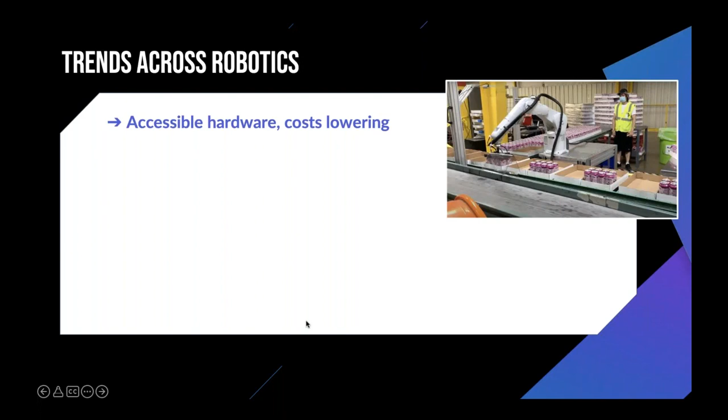Thanks, Meredith. So starting off, I'm sure you've heard a lot about automation and robots, and you wish you could get involved, but it is a steep hill to climb if you're not coming with a lot of knowledge. So what we're trying to do here is really just explain what the trends are, what are you seeing in robotics, and put a fine point on it, and hopefully that'll help you guys make decisions.

One major thing that's happening here is this idea of commoditization of all the hardware that's involved with the robot. If you want to get a robot up and running, it's not just the robot itself, but it's also the stand that it comes on, and the gripper that goes at the end of the robot arm. There's vision, there's electrical components, there's safety.

And what we're really finding nowadays is that those prices are dropping. Robotic hardware is now a commodity, and what's sort of left over that is not a commodity yet and is still very difficult is how to get those pieces of hardware to work in your environment. How do you get that robot to do the thing that you want it to do, which is still quite difficult today. You may have also heard the term collaborative robots or cobots.

And this is a new class of robots that are meant to be working very closely with people and workers. This isn't sort of the cage robot you might find in a welding cell at an automotive factory. These are meant to be working next to people, being driven by people or tasked by people. And so this idea of collaborative robots extends not just to robot arms, but to mobile bases. Can you start using robots that are people friendly? And not just safety wise, but also use wise.

And so this has spurred on a lot of technology and a lot of companies. And what we've identified as a greater robotics industry is that we need to get these tools to be much, much easier to use.

I mentioned the mobile robots. Those are sometimes also called autonomous mobile robots, or AMRs. It's basically a new class where these robots can navigate the floor by themselves and basically make deliveries within the floor, or move material handling things, do material handling tasks by moving parts from one end of a facility to the other.

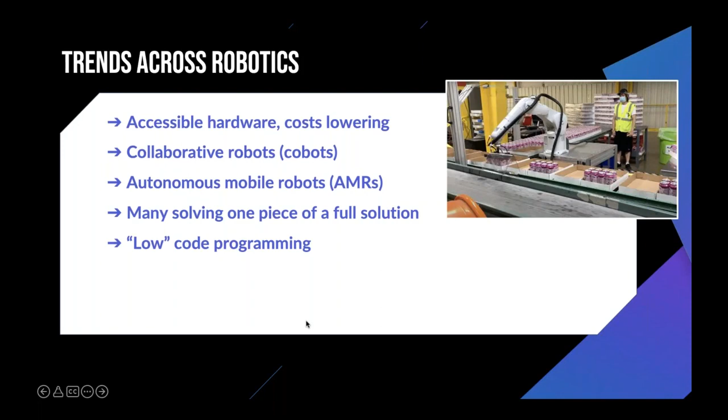We'll talk a little bit more about this term within this Industry 4.0 concept called high mix, low volume. Can I not look like a car manufacturer and look more like a copacker and still be able to automate? The short answer is yes, Southie is here to help, but it's not as clear cut as you'd hope it'd be, but that's what Southie and other companies like us are trying to do.

There's this whole notion of low code programming or easier setup and programming, and we'll talk about what that means. But it's a trend that you should sort of keep your eyes perked up about. Either it's called low code or no code, meaning that these are robot systems that are meant to be easier to use. And as I was alluding to, integration is still the barrier.

It requires hours and hours and hours of expertise to even know not just how to program the robot, but then how to put that robot into an environment where it can operate in the best way possible. And I'll talk a little bit more about what that means.

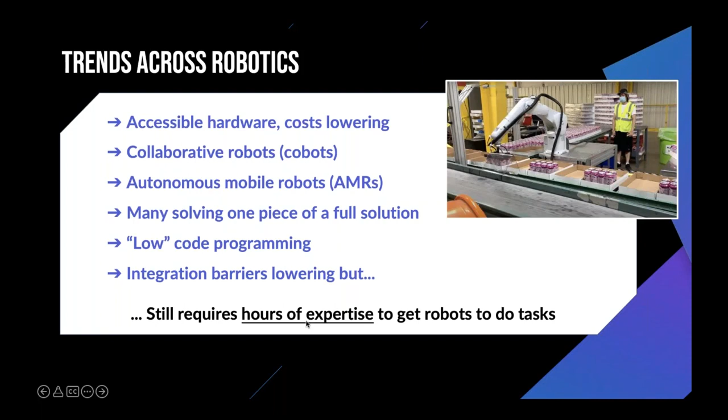And that 10% makes up the $28 billion robotics industry just from the hardware side. The systems and integration and software side are almost 3 to 4 times that cost. And so what we're missing is the rest of the 90%.

And what's really driving that 90% is that they're completely automatable. We should be able to automate them, but they're done manually today. What's driving that is the fact that there is a lot of variability across how often you're doing that thing. It really points to this idea of high mix, low volume, meaning that you have lots of different products, different SKUs that you're running through.

You're just doing it at smaller volumes than a very large manufacturer would do. But the tools that we're developing, the tools coming out of the robotics industry, should be able to address that problem. The trend is that robots should be ubiquitous, every copacker should be able to use them, but we don't have that right now. Well, why is that?

The main barriers here are changeovers. We have that high mix, low volume situation. You're going to do a different product daily, weekly, or monthly, and those volumes are going to be low and they're going to change. The brands driving these trends for consumers are also demanding more and more variation in their product.

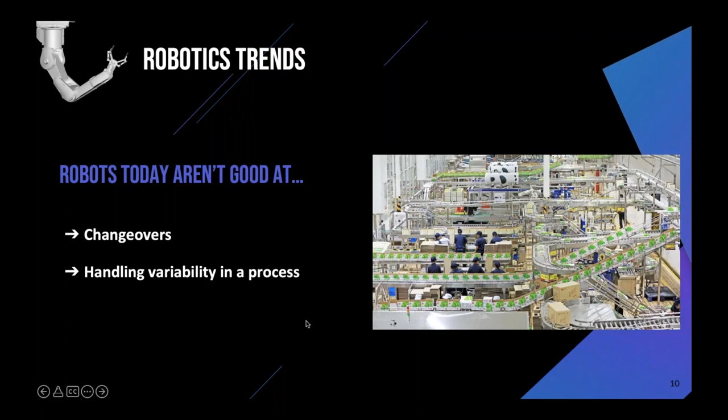So what we have to be able to do with our robotic systems is handle variability within a process and across processes. The part I'm packing doesn't come to the robot exactly the same way every time. I don't have specific feeders for every single part variation. And I'm not going to run one process all day, every day for years. I'm going to run through 30 different SKUs over the course of a month, or maybe 10. Even if it's just 10, it's still really hard.

So what that means for a robot installation is, in order to automate high mix, low volume applications, you either need in-house expertise to be able to change that robot over a lot, or you want to work with an integrator you trust greatly who can do that—however, that's not the case today, integration is quite expensive—or three, work with someone like Southie, where our whole tool set is to make it easier for people to change over on their own with their in-house folks, without having to have that robotics expertise all the time, which is expensive to develop and hire for.

So just to lay that out graphically, one of the things we talk about with high mix, low volume is the number of production runs. For any given run in a process, how long am I going to do that same run for? Is it a month? Is it 3 years? Is it 10 years? And then for each one of those setups, each one of those processes, how much does it actually cost me to set that up?

This is another way of saying how much expertise and tuning do I need in order to do this. Hardware is obviously a piece of that cost, but what we'll talk about is that for any given robotic project, the cost is about 20 to 25% hardware and about 75 to 80% integration or non-recurring engineering costs, where you get an integrator or use in-house engineering to actually get that solution up and running.

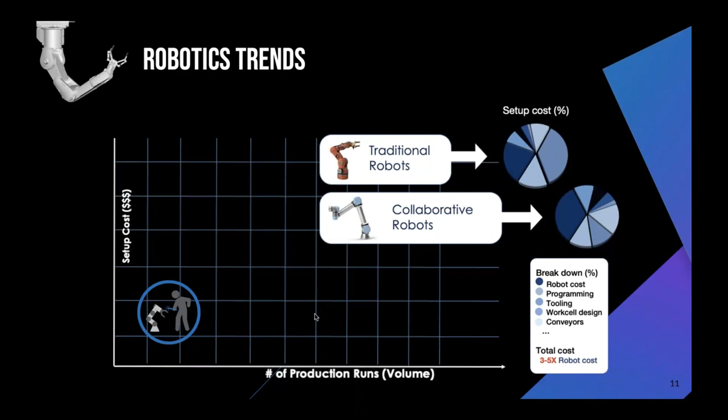And that's the sort of low code, no code place that a lot of companies are playing. And for Southie, what we focus on is that really deep lower left-hand corner. Can I run one shift and have the robot do something else on another shift?

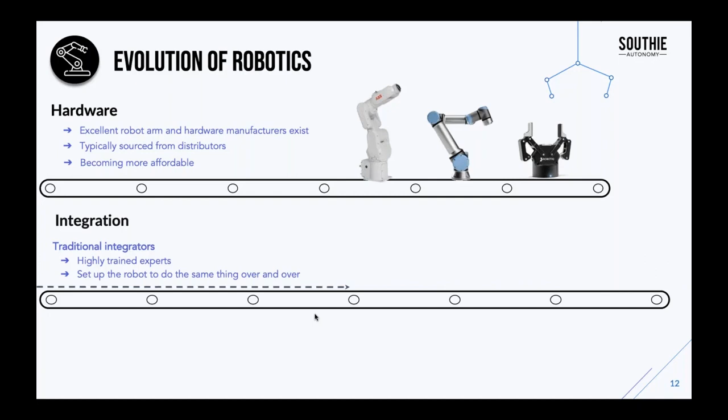And so when we're going to talk about robotics, and basically for most of the rest of the talk, what we're going to focus on is this integration piece. How do I get this hardware to actually do the task that I want it to do? And so we have a few options.

The first is the traditional integrator route. You're going to hire a third party with trained experts. They'll come in, assess your process, make some recommendations for what that robot process should be, and then do the integration for that. However, since that is integration heavy, a lot of that cost is going to be their time to make sure that your process is exactly spec'd in a way that's friendly to a robot, right? And the part's going to come exactly to the robot in the same exact way every single time with no variation.

And then can I place it into a pack or whatever we're going to be placing into a pallet with specific boundaries of, is it plus or minus 1 millimeter or plus or minus 2 millimeters? How close can I get that part to be presented to the robot the same exact way? And the more precise you have to be, the more expensive the cell will get. There's ways to mitigate that with vision, but then again, now you need a computer vision expert to maintain that process. And lighting and all sorts of other factors will vary. The temperature will vary how well a computer vision solution will work.

So traditional integrators can get very expensive very, very quickly. There's a lot of integrators that won't get out of bed for less than $1 million. And so if you have a task that's going to cost less than that, if you have one particular station with one worker or two workers in there, is that going to provide you with ROI?

Probably not. And so there's a whole set of other tools that are out there that you'll either, if you have in-house engineering, you can start using that and training them up on these what we call low-code type of solutions where it's slightly easier, but you still have to know about robotics. You still have to understand how robots should move and how to bring the parts to and from the robot. There's things like waypoints and drag and drop.

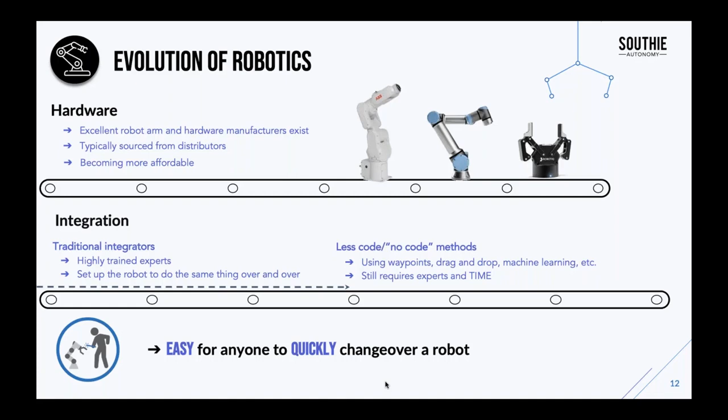Thanks, Rahul. I'll pause here just in case we have any questions, or if anyone wants to comment in the chat, have you experienced these things Rahul was talking about? Have you done research in robotics, and has this come up as a trend? Have you seen companies like Universal Robots or others teach this waypoint kind of drag-and-drop method, less code or no code, to help reduce some of that integration process? I'll do a quick pause for questions, if not I'll keep moving.

I think, Meredith, there is a question that popped up. You mentioned a shift or one day's worth of production. Is that kind of the checkpoint for this? Is it one day's worth of production and you can probably justify these things or not?

Yeah, that's a great question, Ron. It kind of depends on the robotic solution you're looking at. I can speak from a Southie perspective - we've had customers that run one shift and have seen return, based on our model, which I'll talk more about in a couple slides. But the traditional integrators will typically be looking for more than one shift to find that return because the cost is so high. They're looking for higher repeatability, higher volume to see return. In terms of the less code, no code methods, there's kind of that in-between ground - it depends on who you're working with and what solution they're providing.

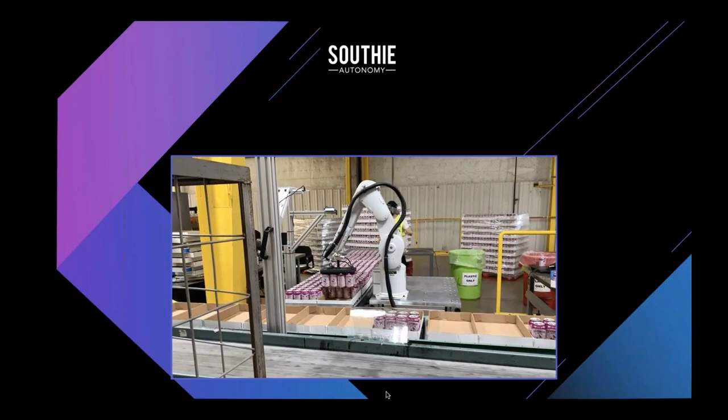Great, thank you. All right, let's move on to the next section here. We're going to talk about how to start automating, and I'll be using our variety pack use case as an example of how we walk through that process. We'll have a few points on why this was a good case for us to start with.

So to begin, we need to start incorporating automation. We have a lot of challenges with labor in the market, and we can use robots to help offset some of those challenges. But how do we start? Typically, what we look at first is making sure we're aligned with the business team and the operations team, and making sure you see alignment across the company on your goals for what you want to achieve with automation and where you want to achieve that return.

So success of a total automation project does require buy-in across teams. At Southie, we recommend having point people for the business end, the ops end, and the maintenance end. When we help facilitate these discussions with our partners, we do this early on in initial project discussions. Why is this important to have everyone in the room? We want to make sure the goals align for each area of the business, and that we can drive towards meeting those goals through our design and automation, and where we pick to start automating.

So for the variety pack project, for example, we had the business team thinking from more of a strategic perspective. They're thinking about adopting automation for our customers, since our customers want to see us innovate with technology, and we have board or leadership pushing for automation too. So the business mindset always seems to come from what's our cost return, what's our bottom line, and how we can influence external partnerships.

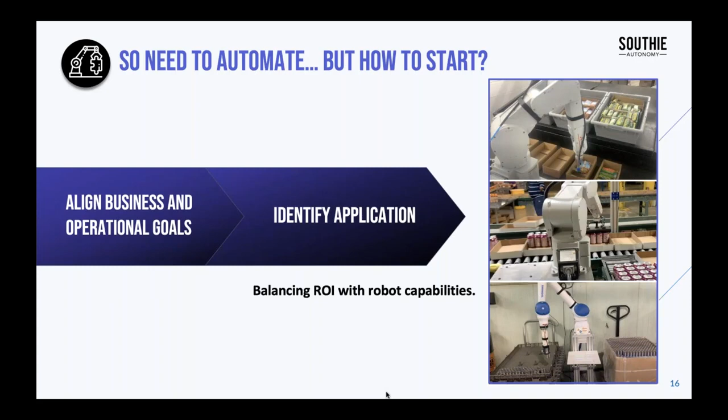Another thing is to make sure you're balancing this return with the robot capabilities today. If the application you want to automate is too complex for the technology that's available, it could require a lot of engineering hours, and this could mean a long time until you get the robot on the floor. It might be possible, but it's just going to take a long time to actually see return.

In order to assess the complexity of the application you want to automate, we do recommend consulting with an automation or robotics engineering expert. At Southie, this is something we do to help our customers and partners spec out the best place to start. But you might have someone in-house that's an automation or robotics expert. We really recommend having that person in the room to discuss where the best places would be to start.

For the variety pack use case, for example, we looked at factors like the volume of the task, and the number of shifts that the variety pack is running on the line. In this case, we were able to see return on a one-shift operation, but it was not the only product running on that line. There were other products running on that line too, and they were still able to see returns specifically just for the robot packing cans.

Some other points we considered is that this variety pack application required a high number of workers on the line. There was a lot of people manually packing on the line to be able to hit those daily production goals. So this was a good place to help offload some of those workers by using a robot.

A third point to consider is that if you're running the application for multiple shifts, you do tend to see return much easier for a robotic solution. In this case, it was a one-shift operation, but to Ron's earlier question, for other robotic solutions, usually looking at two or more shifts is better for automation, though it depends on the application you're looking at.

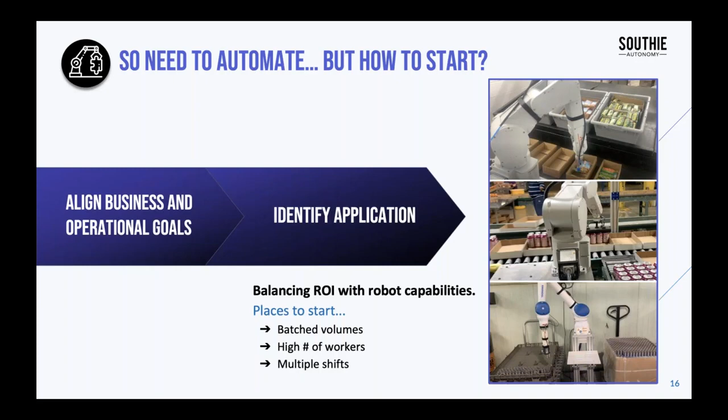Yeah, and that's a very good point. That's why it's important to have these robotics engineering or process engineering experts to understand how the parts are getting to the robot and how they're moving away from the robot. It's not as simple as just sourcing a robot arm itself. There's a lot more components that go into it, which we'll touch on in a couple of slides here as well.

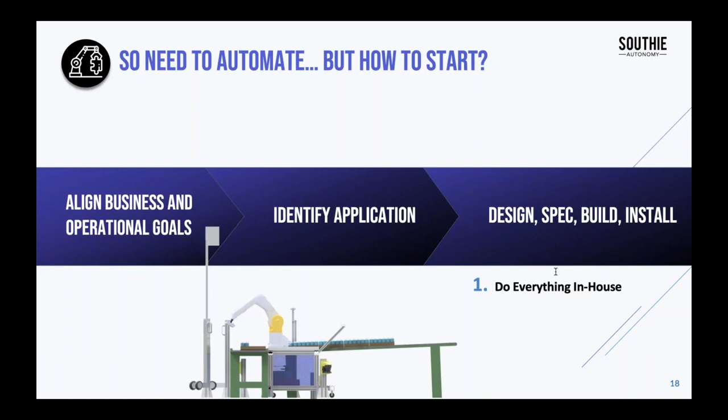But I wanted to talk about, from a high level, some of the options that are available to do this today. So there is the option to do everything in-house. We do recommend having an automation or robotics expert on hand to be able to do this, but there's a lot of great robotics hardware available today and different components where you can source off the shelf and put them together to make a full robotic solution, just making sure you have the expertise in-house to do so.

The second point here is to outsource to a traditional integrator. Traditionally, robots have been integrated with an integrator who will redesign a process to fit around a robot, then create a custom program for the robot to do the same task over and over again. This can be more expensive and time consuming, and every time you need to do a changeover, you'll need to call that integrator and have them reprogram the robot.

Lastly, you could partner with a company like us, where we make this much more flexible than traditional robotic solutions. So instead of having to create a new process around the robot, you can put a robot right into the current process with very minimal changes. This means the deployment time for our partners is significantly less than other robot solutions available today.

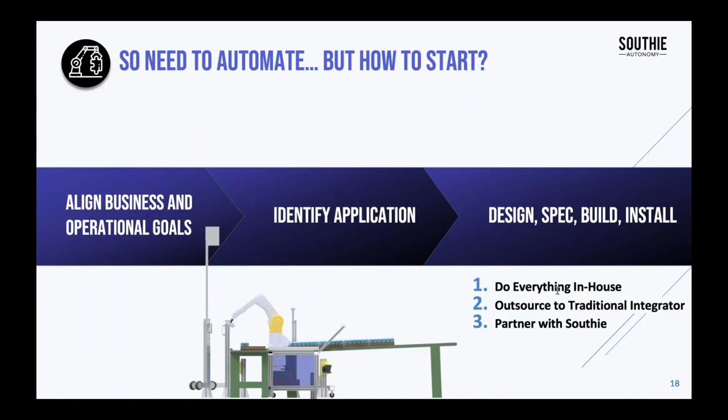All right, I'll pause there for some more questions or any thoughts. I'd like to put it out there, what automation projects are you working on today? And if there's any specific implementation questions, just gonna pause here. The caveat is, if you're not working on projects, why is that? Is it a technical issue, or is it you having trouble identifying the right task? We'd love to hear the challenges in automation. Feel free to use this or put questions in the prompt.

I think you guys can go ahead and go on. We've got some other questions coming, not pertaining to the automation projects, but okay.

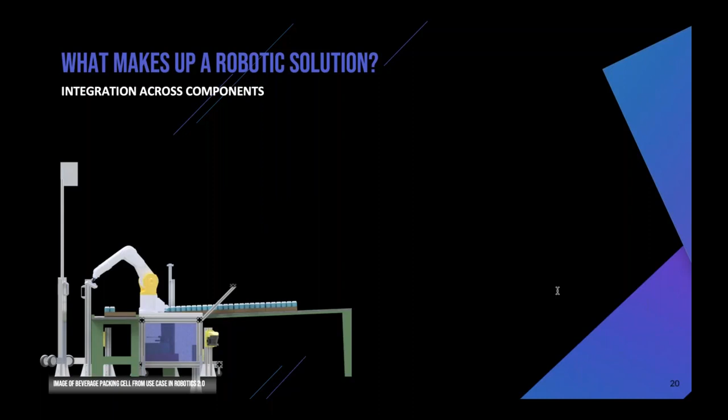Great. All right, so then the next section here, I wanted to jump into a little more detail of that design, spec, install process. What does that look like? So on a high level, just to start, what are the components that make up a robotic solution?

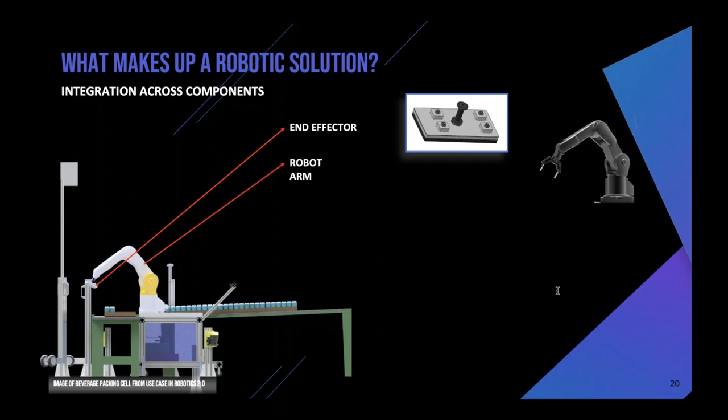Here's a model of that variety pack example robot cell, and some pieces we have in this that are off-the-shelf components are the end effector, the robot arm itself, a camera vision component, the robot stand and mount, and the conveyors. One last piece here is the safety. There are quite a few components that go into this cell other than just the robot arm itself, and each of these components, like the end effector specifically, needed to be sourced specifically for picking up cans and placing those in a certain configuration.

There are a lot of different end effectors you can use on the market today. There's suction, there's 2-finger grippers, and a lot of other different types you can use on a robot arm.

Yeah, and more of these are becoming commercially available off the shelf, so you don't have to spec a custom end effector every single time. There's companies like OnRobot that have stock grippers that are varied, they can pick up lots of different things. There's also something called tool changers by ATI, where you can have the robot cycle through a lot of different grippers to handle different types of product. So if you did have a lot of mix even within one process, it's not a deal breaker that you might have to change grippers.

I think this is also a good point to make a note about the safety equipment. On this robot cell, you can see there are 2 safety scanners, like safety lasers that create a light shield, so if a person were to enter too closely to the robot, it shuts the robot off completely. We also have caging around this variety pack robot for the other areas the scanners don't cover. So it's important to keep that in mind.

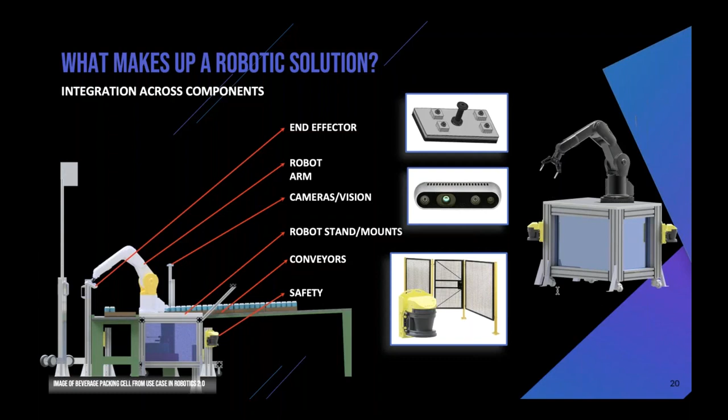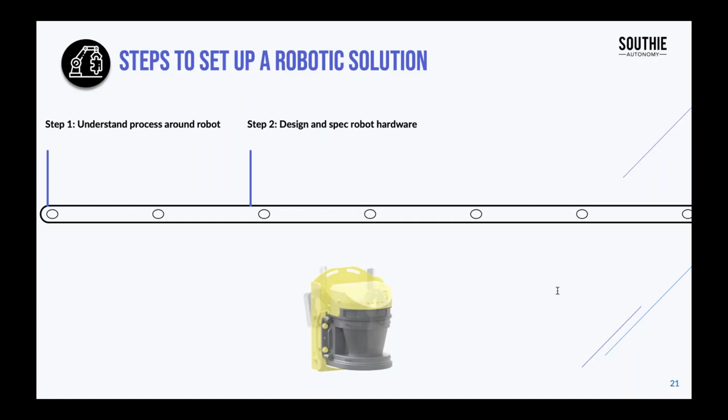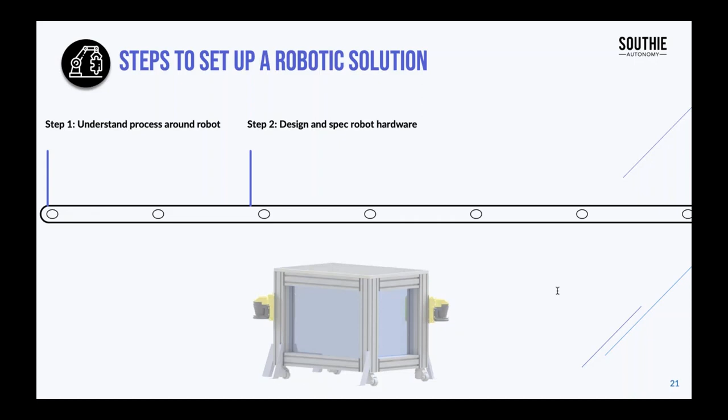So I'll move into the steps for setting up a robotic solution. Once you source these different components and have a design, first step is to understand the process around the robot, then design and spec the hardware according to what fits that process. The third step is to be able to source all those components from vendors and distributors.

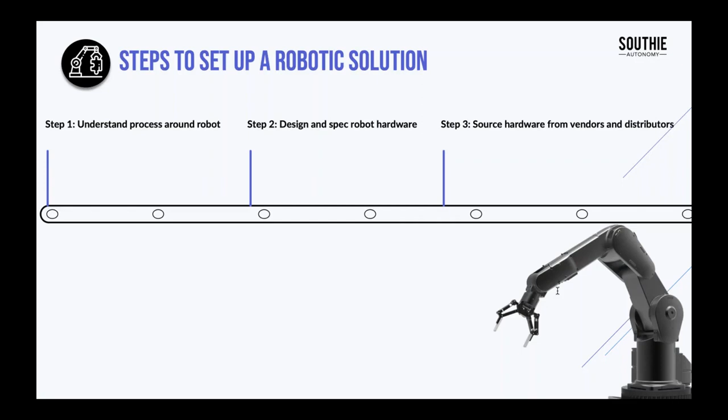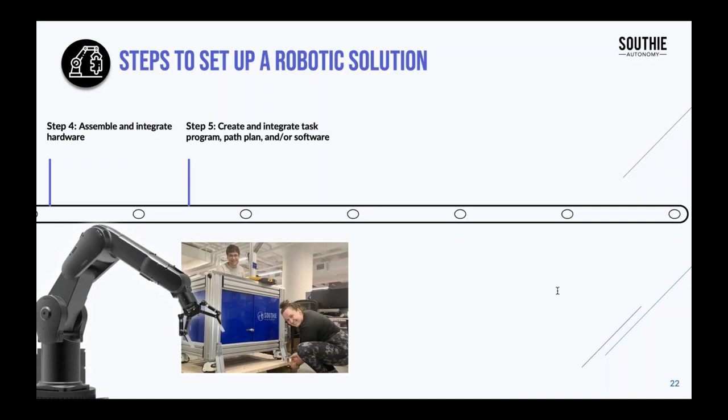Once you've designed the cell and sourced the proper components, then it's a matter of being able to assemble and integrate all of that hardware. The next step is to integrate the software on top of that hardware, using path planning programs, hiring a traditional integrator, or working with Southie. Step six is to install that solution, and the last step is to train people how to use it and maintain that robot cell.

So this is a process, this is how we break down our process. We actually work with our partners to do all of these steps. We help guide through that process, but if we were to break it down, that's what it looks like.

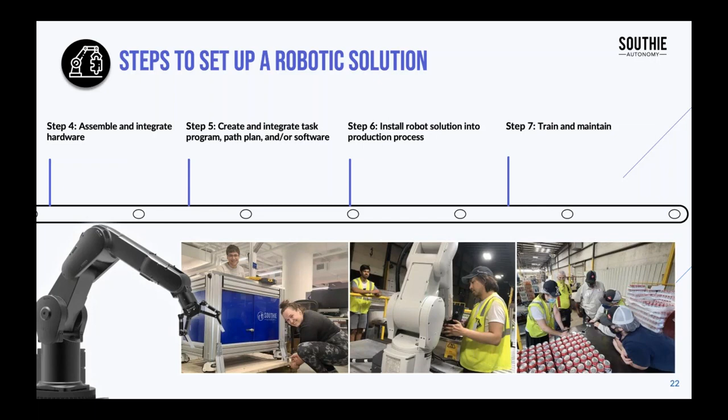All right, I'm going to move into a video of the Variety Pack robot in production to show you how all of this came together. Go ahead and play this now.

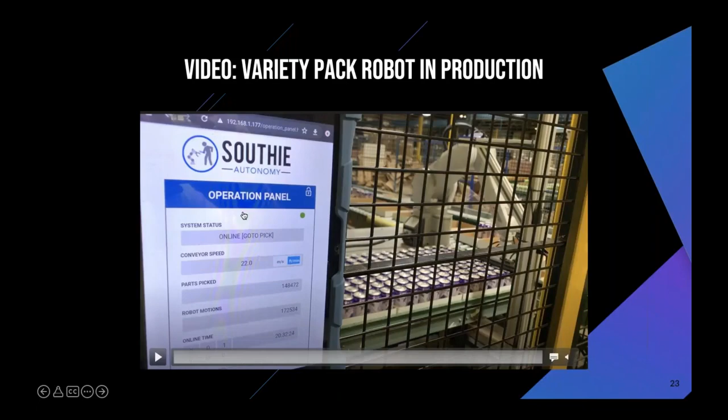What you see here is an industrial robot arm with those components we talked about. It's picking up cans and placing them into every other tray along the line. Workers are working on that line right next to the robot, placing cans directly into the trays just like the robot is doing. Our goal for this project is to make sure we were integrating a robot into the current process versus having to redesign the whole process that exists today.

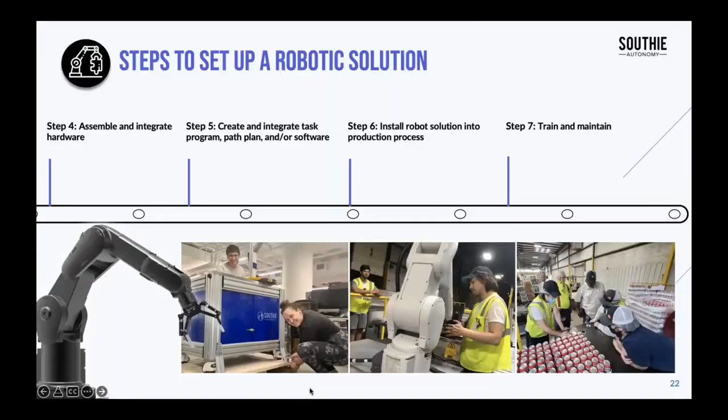That's our goal at Southie, to make a robot flexible enough to work like a human would in this process without a lot of revamp. The other key was to handle in-process variability, like Meredith was talking about, since the cans are going to be slightly off-centered every time, in a slightly different position, as well as the trays coming down the line.

Additionally, if you use our simple app to do a changeover, you would just describe a different configuration. What if it's an 18 pack and you're only placing 4 cans into it, or you want to place the cans in a different location in the tray? That can all be changed without involving an engineer. You could simply use our app or our tablet to describe that task at a high level, and our software will figure out how to change the robot movement and programming on its own.

So in order to change the robot over, you don't have to write any programming at all, no code, no logic has to be communicated, just how the task is different than it was earlier that day or yesterday. This is something unique to Southie. You won't find this at other integrators or other solutions.

All right, so I'll move on to some takeaways, tips, and best practices to summarize. Robotics can be complex, so we recommend consulting with experts in the robotic space to help guide you through this process. This does take time, so start now versus later. There are a lot of discussions around aligning business operational goals and picking where to start with automation before you even put a robot in there, so starting that process as soon as you can helps speed things up.

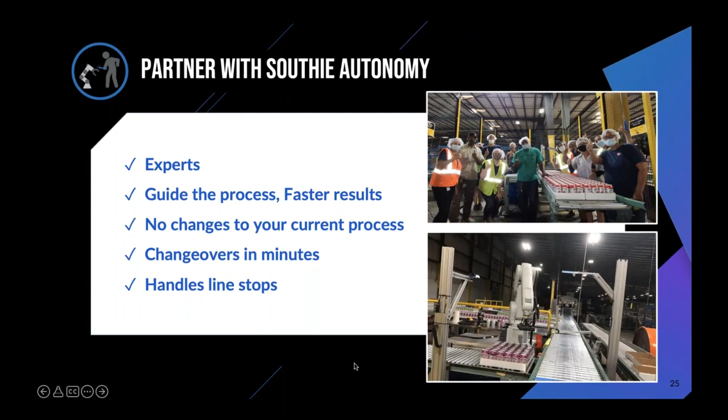What specific industries have you seen the most acceptance to this technology? Can you give us any examples?

Obviously automotive has adopted robotics far and wide, but when you go to an automotive facility, you'll still see a lot of people doing a lot of work. Those are typically going to be the tasks that are very dexterous, or tasks that are small in volume—you basically do one task, then another, and switch over really quickly. The same goes for electronics as well as the consumer goods product area. So the big brands that probably a lot of you guys work with, CPG, has a very large automation presence.

That's the nature of the question. Well, let's pull it closer to the co-man copack space. In a copack arena, where have you seen maybe the early adoption of this technology make sense? Where have you seen most of this type of industry or these subsegments adopt this?

From a copack standpoint, end of line operations are typically a good place to start—palletization, some wrapping, some picking and placing is always helpful. Also feeding for machines—if you're feeding a wrapping machine, that's a great place to look too. Again, you'll just have to be cognizant of how those parts come to and from the process. But yes, machines is a big one.